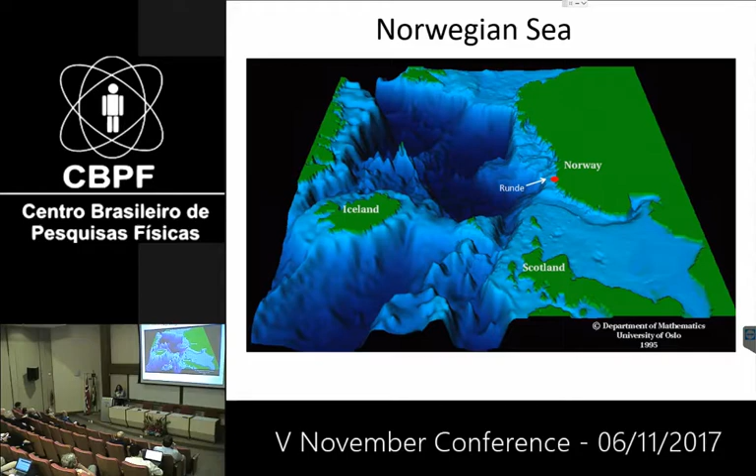It is close to the deep sea and close to the fjords. It's a small island in the Herøy comuna, and this area is very known for its shipping activity.

So here is our research station. We have labs, we have offices, we have a conference center, museum, cafeteria, and test facilities for ocean energy. And the scientific plan calls for work in the fields of oceanography, marine biology, marine pollution, deep sea and coast monitoring, and seabird monitoring.

So, Runde Environmental Center is used to working in tight contact with academia, business, and the public sector. 40% of the center is from the municipality. So we need to help the regional development of the Herøy comuna. So Runde Environmental Center wants to create marine data from the industry and wants to strengthen the regional business and the scientific institutions in Norway.

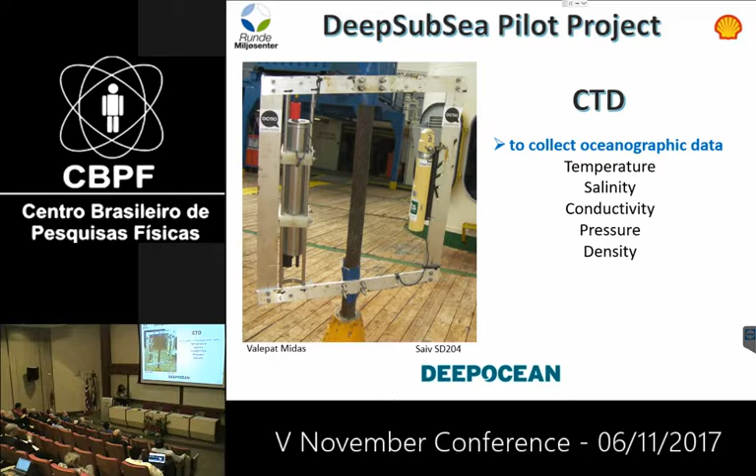It's 2 CTDs, and we found out, for example, the temperature was positive from the surface up to 600 meters. We also registered a halocline and thermocline between 200 and 400 meters of depth. So, with only 2 weeks on board and the limitation of the ROV, we managed to analyze 360 hours, register 176 marine animals. 76% of these animals were megabenthic fauna. That means animals bigger than 50 millimeters and living in a close relationship with the sea bottom.

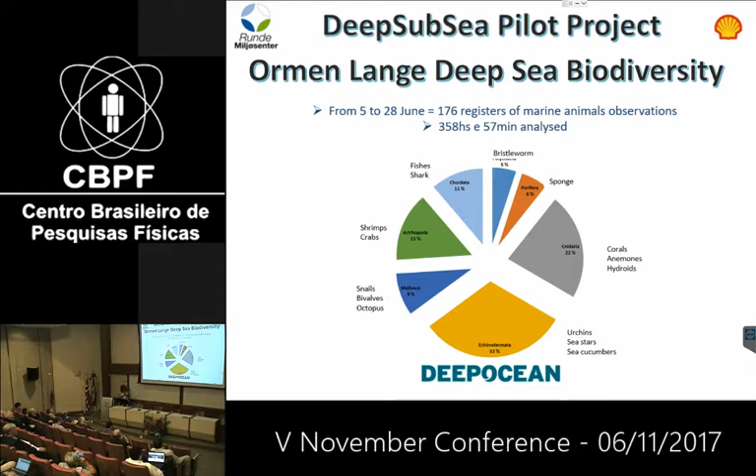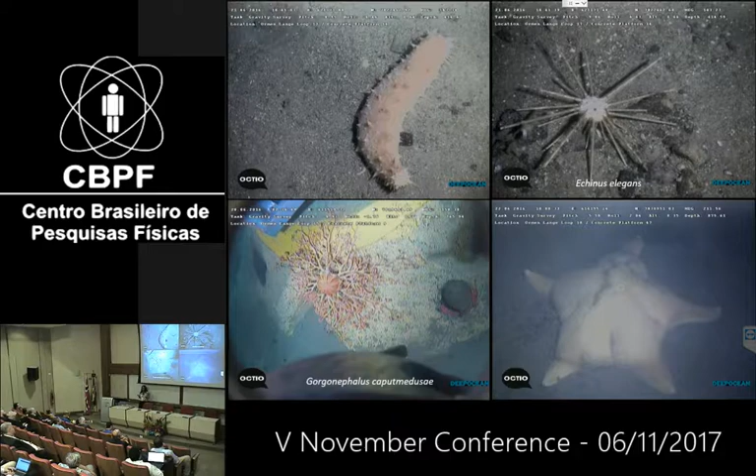Here are some pictures of these animals. Well, as I said, we registered a lot of animals, but many times, because of the gravity equipment, when the ROV comes close to the sea bottom, the sediment rises up and hides the camera visual field, and because of that, I decided to use a conservative criterion for classification of the species.

We observed a lot of fishes using the CP stations to protect them from the local current. These CP stations have been sitting on the sea bottom since 2012, and they are used as a foundation for this gravity equipment. 72% of the fishes were observed below 600 meters with temperature below 0 degrees.

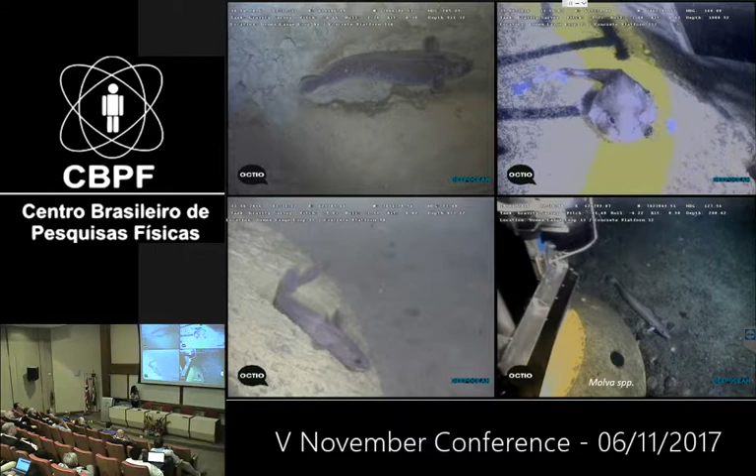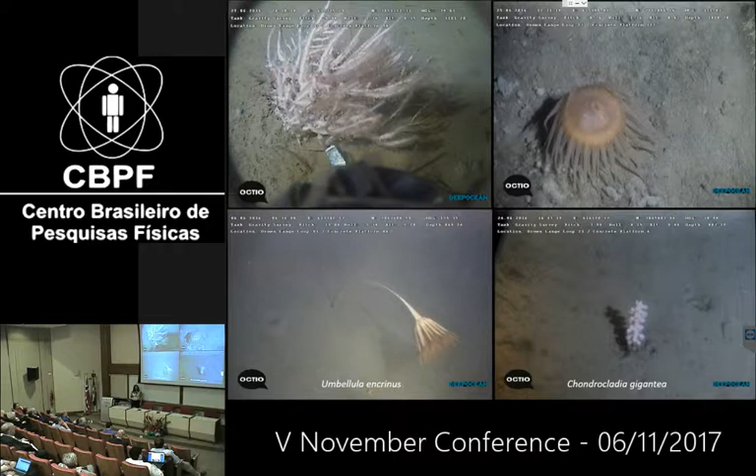The most spotted animal is Umbellula encrinus. This sea pen has been registered in many other surveys in Norway. Looks like the populations are growing in this sediment with mud and sand. And this animal can grow up to 2 meters above the sea bottom. It is considered one of the biggest sessile deep sea animals in the world.

I have a video here. Is it possible to put a video? No?

So this is just a pilot project, but we can see with a little bit of access to the technology, we can really improve the deep sea knowledge. And that's something important for us.

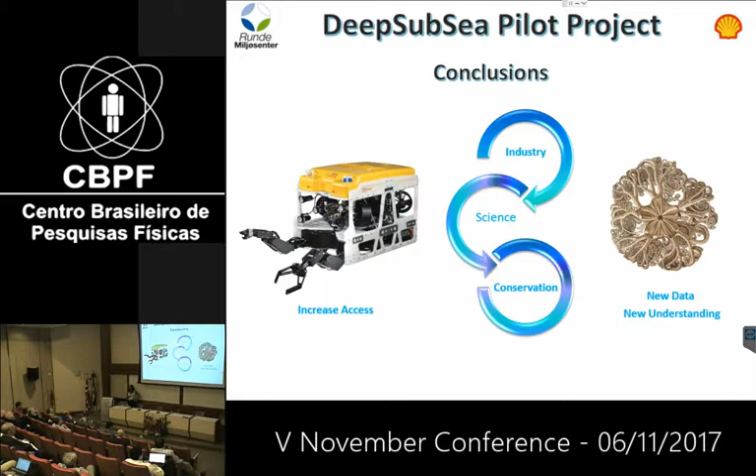Okay. So through the project, we managed to check out how the deep sea is. We got to start up this network with the Brazilians, and after that we decided to continue this initiative,

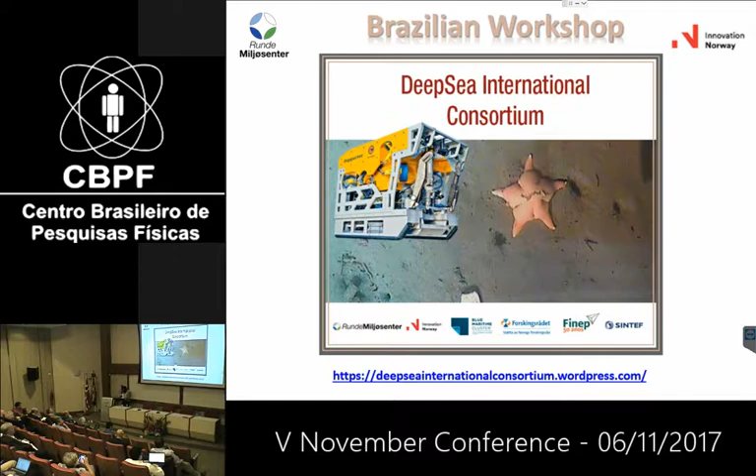the network initiative. Then Runde Environmental Center, in collaboration with Innovation Norway, with the support of the Research Council of Norway and FINEP, organized the DeepSea International Consortium Workshop. That was a 2-day workshop. We had presentations, a round table, and group dynamics. The general feedback from all 51 participants was that the presentations had a high quality and a multidisciplinary approach, and everyone wants to continue this networking.

So we also want to use the momentum that the oil and gas industry is going deeper and deeper to study the deep sea life. And we believe this is the way to collaborate to get a better understanding of our environment.

So we will try to use the arena model to build our cluster. The DeepSea International Consortium is in evolution to become a cluster. And we want to use this model because we want to create this arena for innovation, where the partners can cross their expertise and create new ideas for business and new ideas for research.

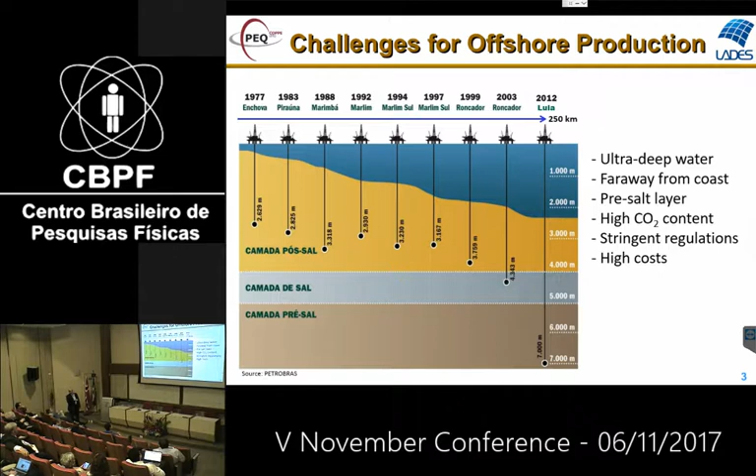Well, the challenges for offshore production: we in Brazil, as you see in this figure, are now producing oil and gas in ultra-deep water, far away from the coast. The gas and the oil are being produced from the pre-salt layer, and the gas has a high content of CO2, which imposes some difficulties and special treatments. There are stringent regulations, and the process demands high costs. Other difficulties are the allocation of multiple wells and the fact that the flow is multiphase.

Additionally, new technologies for subsea processing, with the objective of accelerating production or improving recovery, are subsea units that are difficult to maintain, and at the same time they demand full automation. If we also consider that the process itself is time-varying, nonlinear, and subject to severe disturbances, we really have a very big challenge.

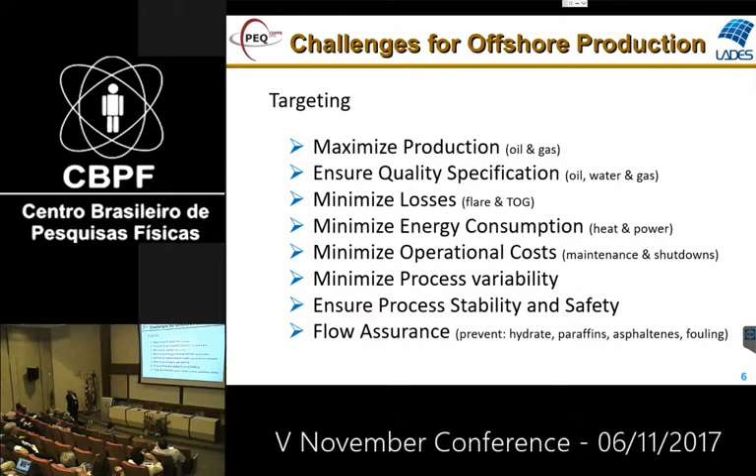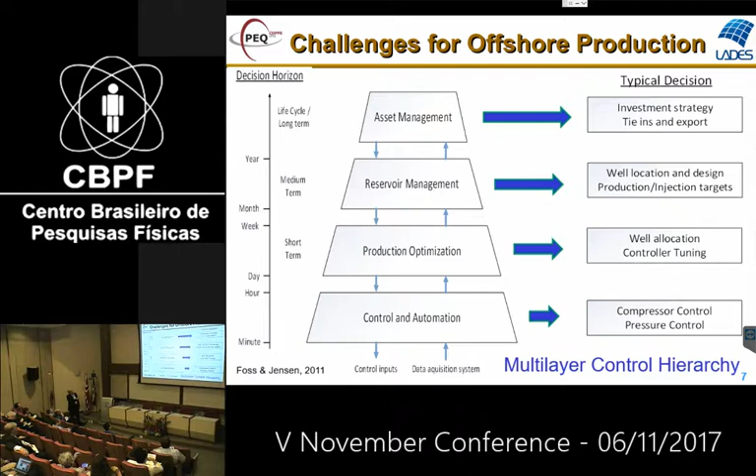Of course, the levels are interwoven, but our main targets are the advanced process control and real-time optimization. So those targets that I had presented before are dealt with here. And in terms of the mathematical formulation, the optimization problem must also consider that the variables must operate between limits of operation due to safety reasons. So we have a constrained optimization problem.

Well, as I said, how we have been working for the advanced process control: mostly, we use virtual plants. We consider that virtual plants allow quick and easy testing of different control strategies. We use rigorous models, and as we are in contact with industry, we use data information from industry. We consider that these models allow education and training of engineers for these advanced tools.

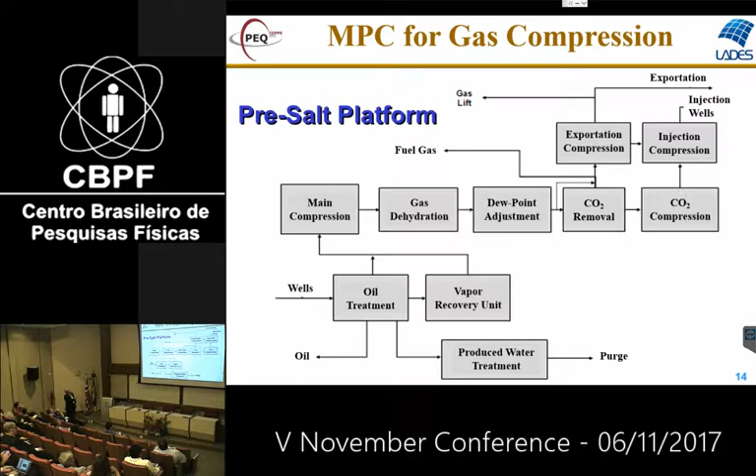Well, I am going to present at the beginning an application of a model predictive controller in a pre-salt platform. I'm going to present it very briefly because it was a topside development. We were concerned about the production of natural gas for exportation. And this gas had to be compressed, and at the same time, it had to be conditioned. So we had to study together with Petrobras. We developed the flow sheet in EMSO considering the process. So here is the flow sheet that was implemented in EMSO.

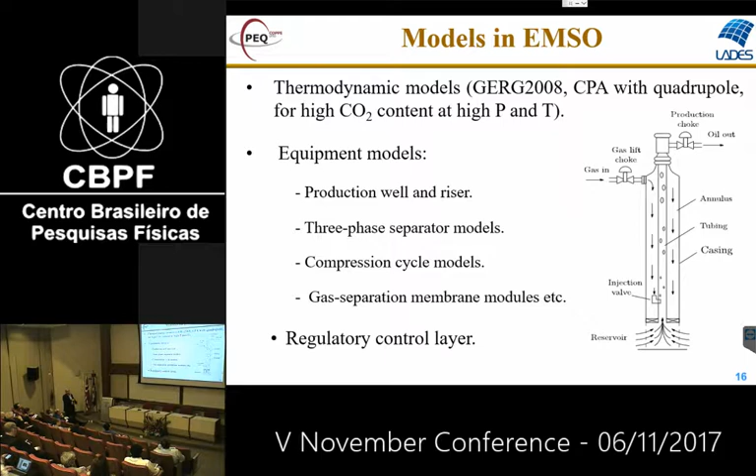We had to implement different models for this project and for others. We had to implement equipment models, like for the production well and riser, the three-phase separator, compression cycle models, and gas separation membrane models, and also for the regulatory control layer. In the case of high-content CO2, we used a plugin named VRTherm, which considered special thermodynamic models for that purpose, so that we are able to simulate that process.

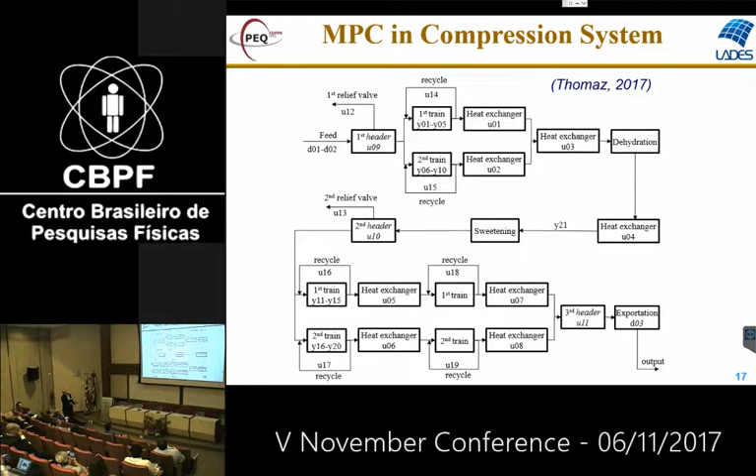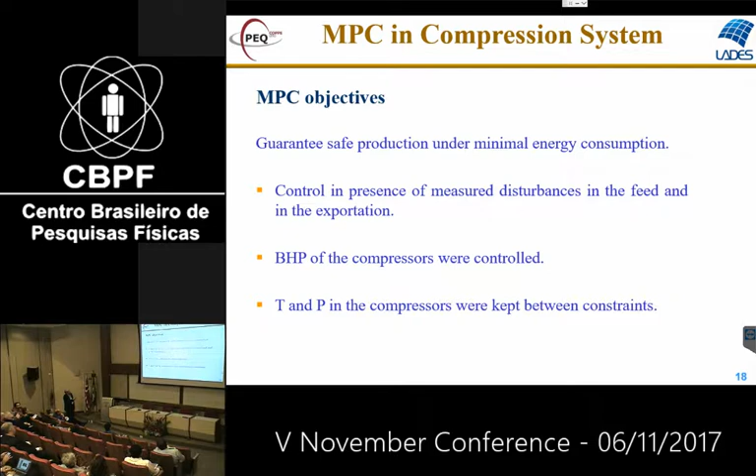Here I show, I will be very brief, that we had many variables that were controlled, especially on the compressor. So it's a multivariable controller that we adopted. Our objectives were to guarantee safe production and minimal energy consumption in the presence of measured disturbances in the feed and in the exportation also. We controlled the BHP, which is the power input for the compressors, while keeping variables of the compressors, temperature and pressure, between constraints.

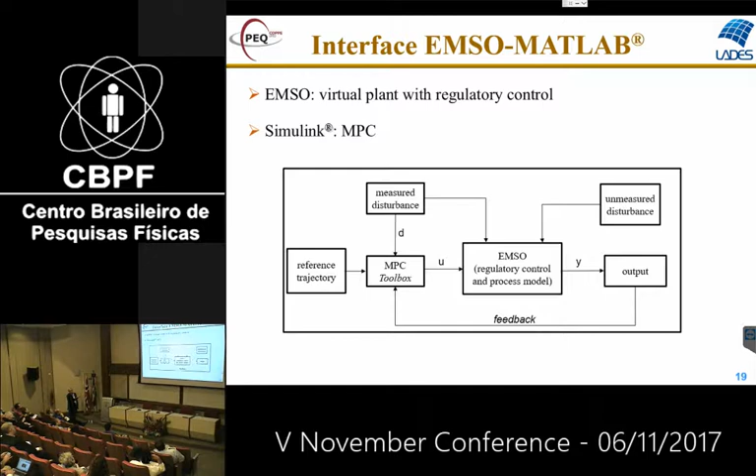We implemented the plant model in EMSO, and we were able to study the process control using MATLAB, for example. And so we had the results that I will show here very briefly. We compared the implementation with MPC and without MPC. And as you see here, the variables should be between constraints. And MPC was always able to keep the variables between the constraints with less work of the compressor and less use of energy, as MPC is a controller developed using a model of the process. So it does a better job.

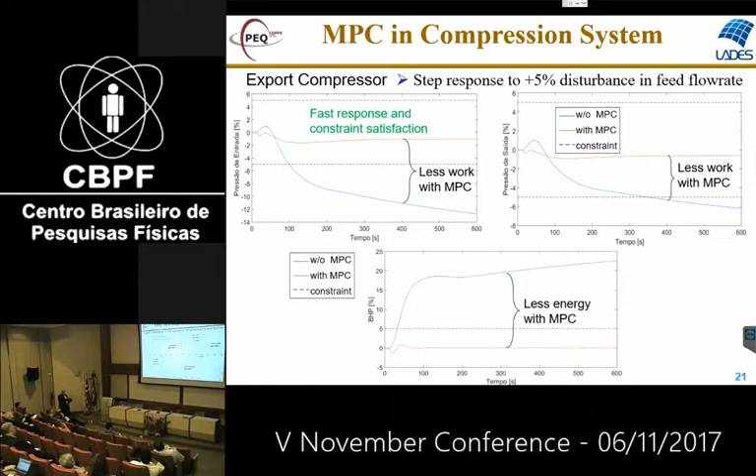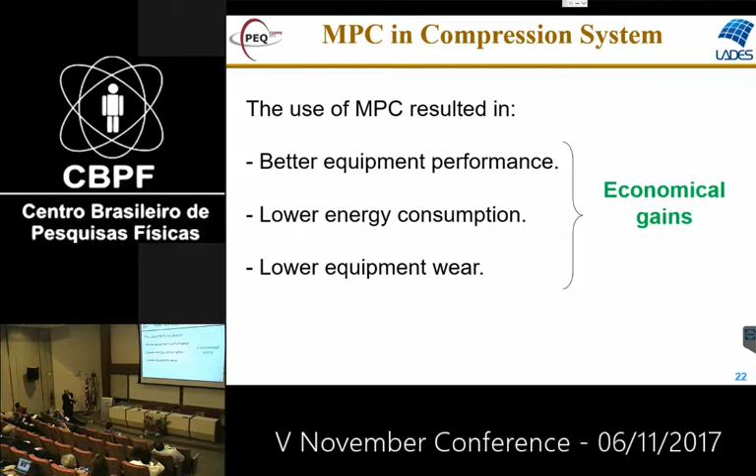And this was for the main compressor. For the export compressor, we had the same behavior: fast response, constraint satisfaction, less work and less energy. So this is an example of the use of virtual models and a model predictive controller. And you can see that this controller resulted in better performance, and with that lower energy consumption, because we controlled the BHP of the compressors, and lower equipment wear. So there is the potential for economic gains.

Now we are starting to work with subsea projects. So I am going to present some major subsea projects that the literature reports exist around the world. And this author here, in a very recent publication, stated that there are about 25 boosting systems around the world and around 7 separation systems.

We separated them here as brownfields and greenfields. And you see there are some applications from Statoil in Norway, like Åsgard, Gullfaks, Tordis. And also in Brazil, here, Marlim, that is a separation system that I will present. And greenfields, like Shell in Perdido, and here in Brazil, and Total in Angola, as some major existing ones.

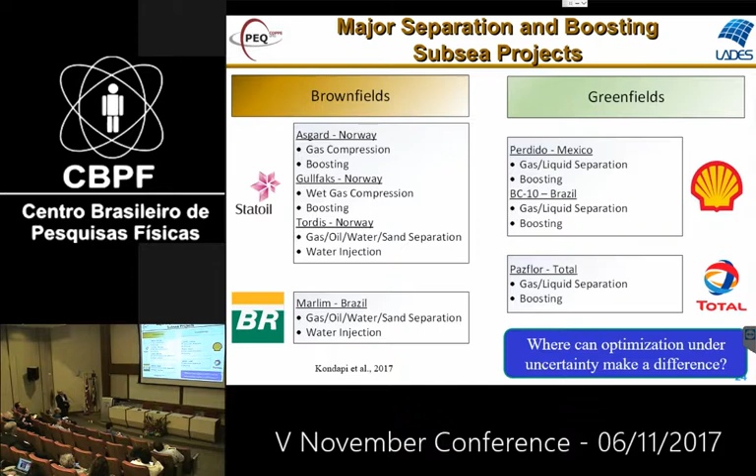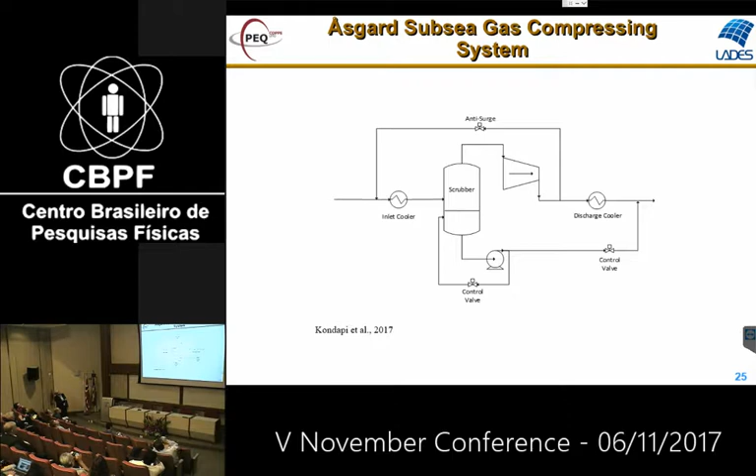And I am sure that the optimization that I discussed previously, but using uncertainty, can help the control of these processes. This is an illustration as an example of the Åsgard subsea gas compression system. And as you see here, the compressor, if I go straight to the goal, the process is typically based on topside compression. And you have to worry about the occurrence of surge, which is a common problem.

So the goal is to operate with maximum productivity, minimizing energy consumption and avoiding surge, but in the presence of model uncertainties. So the compressor control must be carried on with the consideration that the model that we use in the model predictive controller, for example, must consider uncertainties of the environment.

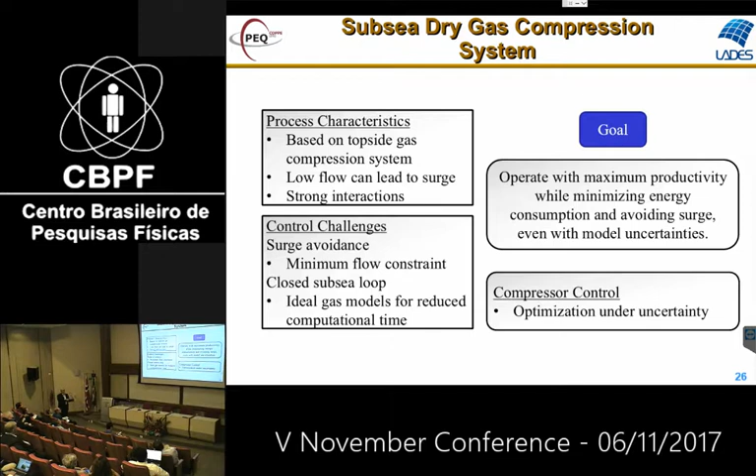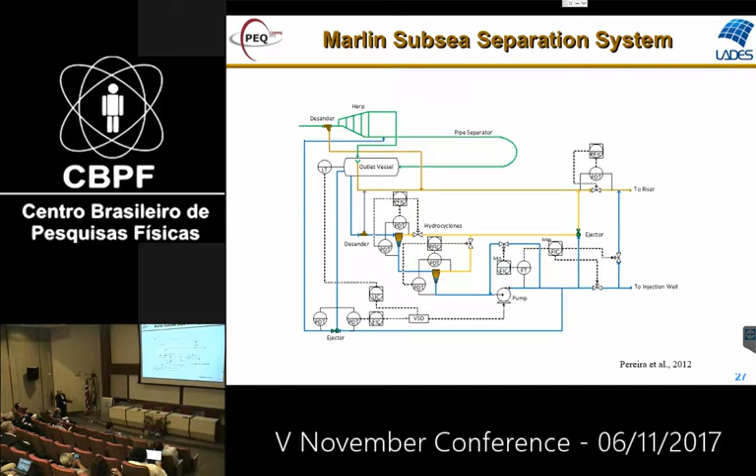If we go for an example of separation, this one is Marlim from Petrobras. This is a reference that was published. So this one separates water and then polishes the water in order to reinject it in the reservoir. This project has some characteristics, like the dynamics is fast, and there are some challenges in terms of lack of instrumentation.

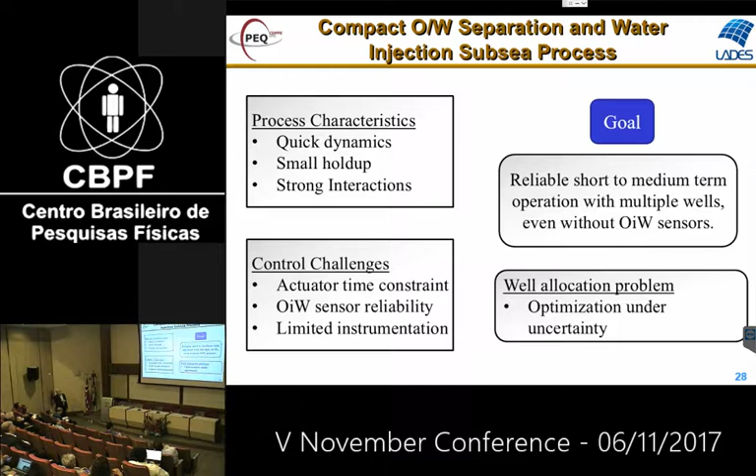As a goal, you have to operate reliably short to medium term with multiple wells, but without reliable or even without oil-in-water sensors. So the well allocation problem should be carried on with optimization under uncertainty. So that's how we are working now. We are working with optimization under uncertainty.

Another subgroup of our group is working with flow assurance. But the question of uncertainty is very important in this context. So I am talking a little more about the problem of uncertainty, because the subsea installations are difficult to access. If there is the need of intervention, it is very high cost. So the system should be self-controlling.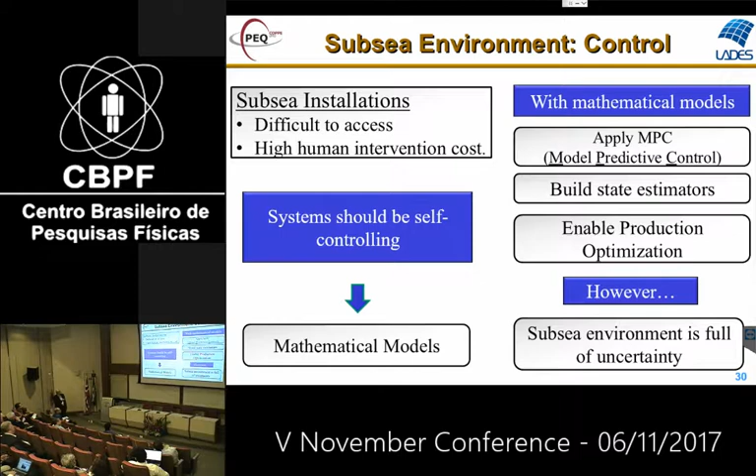And then mathematical models could be used to apply model predictive control, to build state estimators, to enable the production optimization. However, the subsea is full of uncertainty. And where does this uncertainty come from? From the external disturbances, from the fact that the models that we use are simplified ones due to computational reasons. The data that we have may be unreliable, so we have to do advanced control, but in the presence of uncertainty. So we are working with optimization under uncertainty.

And we are now working with this kind of model predictive controller that is multi-stage nonlinear, where we have multiple scenarios. So it's called scenario optimization. We have multiple scenarios in order to consider the uncertainties in parameters of the process. So each model predicts the evolution from a known state. You can have different scenarios, and you can compute the control actions considering all these possibilities.

Now, one of our students is working with this widely known surge problem. Surge is an unwanted phenomenon that may happen in compressors. Using characteristic curves, you can define regions of surge that should be avoided. But as we have uncertainty, we use some safety margins in order to go away from that unsafe region.

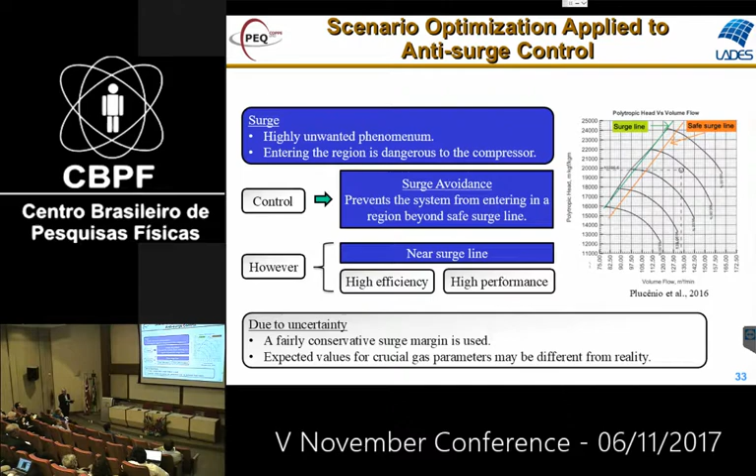And so one of our students, named Ivo, is now working in a collaborative project with a professor from NTNU, Professor Skogestad, and he is studying the anti-surge control, developing the model of the unit, considering parameter uncertainties, and now he is going to implement the multi-scenario optimization and compare with the nominal NMPC implementation.

Okay. This is another research line that professors from our group are working on regarding flow assurance. Flow assurance is responsible for identifying, quantifying, and mitigating the risks associated with offshore production, offshore pipelines in subsea. Because, for example, you can have formation of hydrates, which happen in the presence of some formers, some gases.

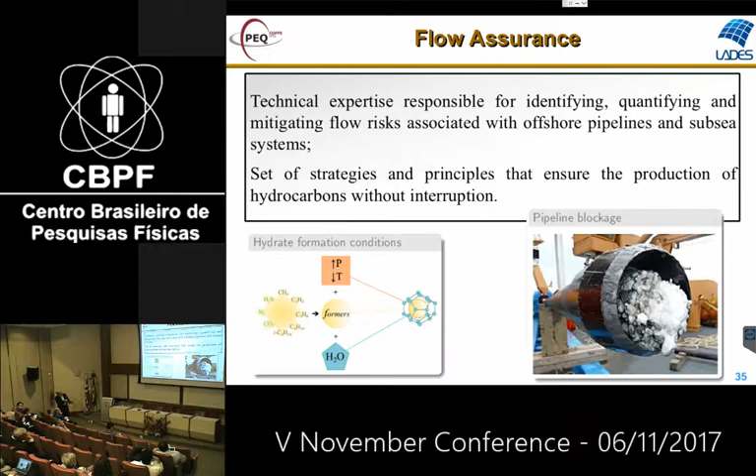Under special conditions of low temperature, high pressure, in the presence of water, a crystalline structure may be formed, trapping the gases, and then the pipelines may present this formation here that plugs the pipeline, looking as if it was ice. And what we have been doing, we are developing models so that we can define the regions that are under the risk of hydrate formation.

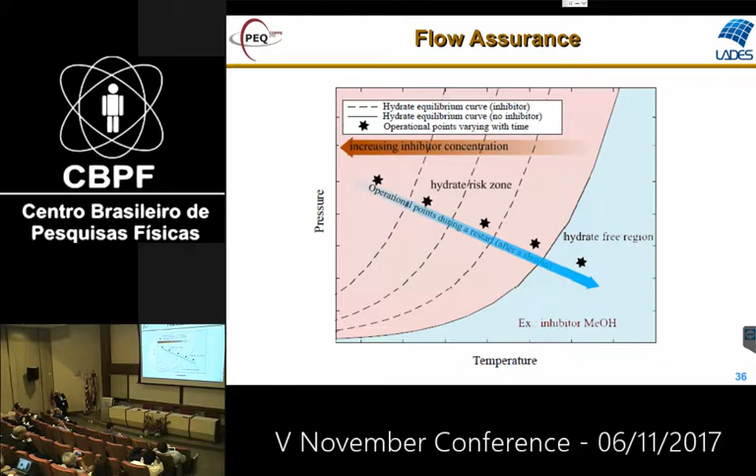And then we can, using models, for example, two-phase flow, predict the flow conditions of temperature and pressure that are inside the hydrate formation regions, and then apply control alternatives, like, for example, to control the topside choke valve to depressurize the system and go away from the region of formation of hydrate. So these are two examples of subsea work that we are developing now.

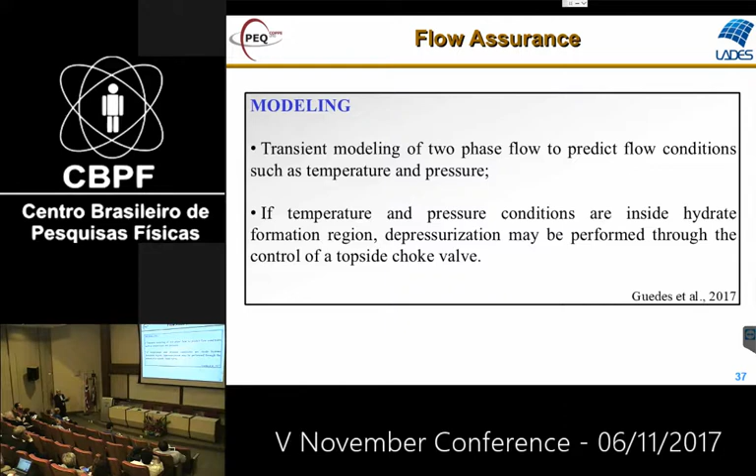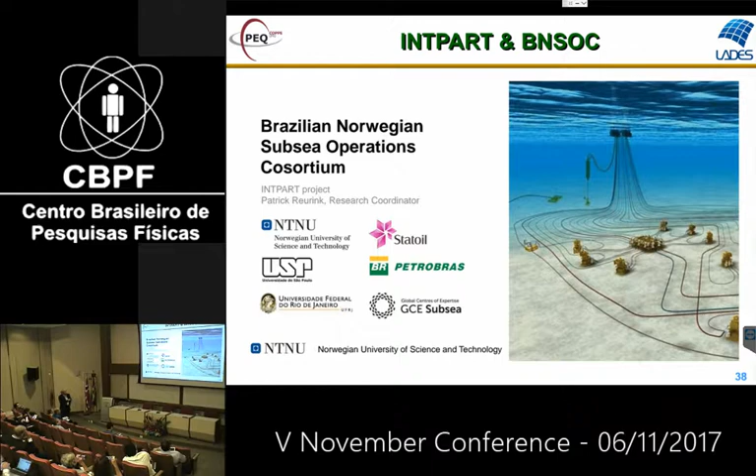This student, Guedes, is also expected to take part in the collaboration because we are taking part of this consortium that Professor Sigborn presented earlier, this BNSOC consortium. So one of our students is already there, and the other one is going maybe next year.

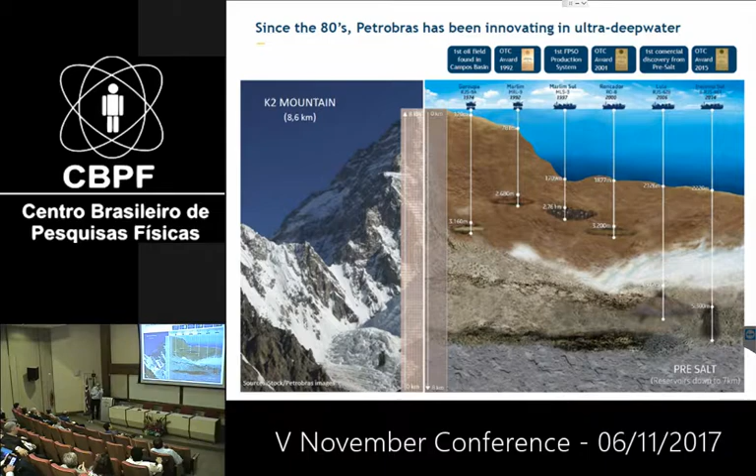Maybe in the future we'll face another kind of change: the need for economic optimization. Up to now, our industry in general has worked with enabling technologies. But in the future we will probably work more on optimization technologies. And it's not straightforward, small optimizations or small changes. We will need step change technologies to deal with future needs.

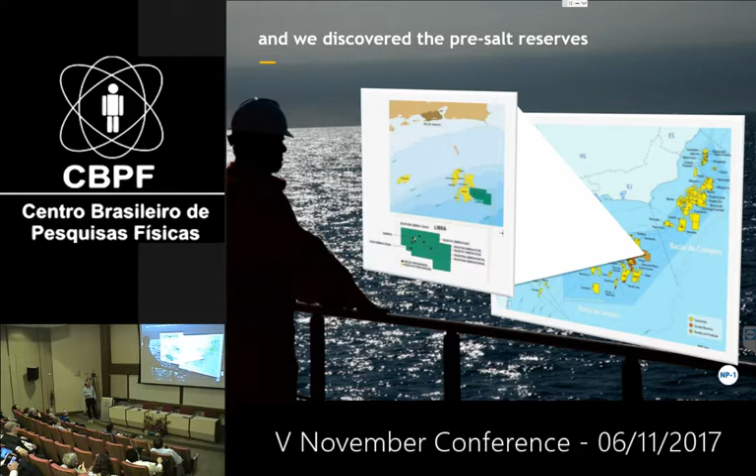In the pre-salt, we face deep water and sea conditions more challenging than we have faced in the past, and fluids with a high content of CO2 and H2S. We have been able to overcome these challenges. We are producing nowadays a large amount of oil. About 50% of this production is being carried out in the pre-salt, and this production will increase.

These figures, excuse me, have some mismatches. It seems that we will have an increase of around 40%, 50% in production. But this is Petrobras production. In fact, part of this increasing oil production, with Petrobras as operator, will belong to our partners in the pre-salt, which means we will produce more than 3 to 4 million barrels per day.

The other important thing is that we will have the natural decline of the mature fields, which means we will need to install a very large infrastructure to achieve these productions. There is some pessimism in our industry; it seems that we don't have many projects in the near or long-term future. But the message of these curves is different. We'll need many subsea equipments and systems to achieve this production.

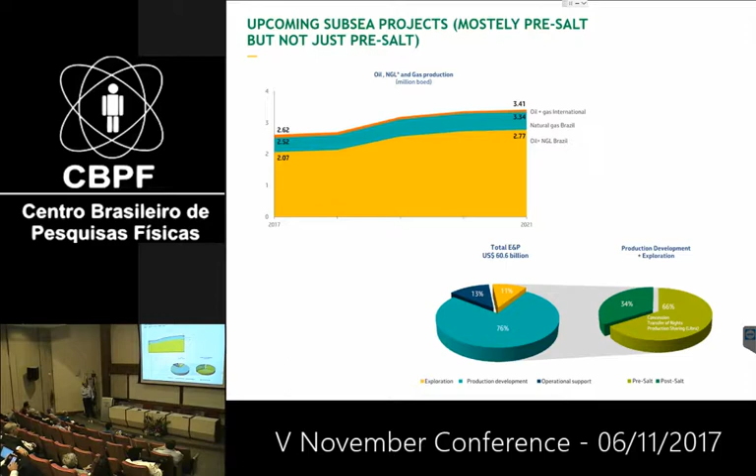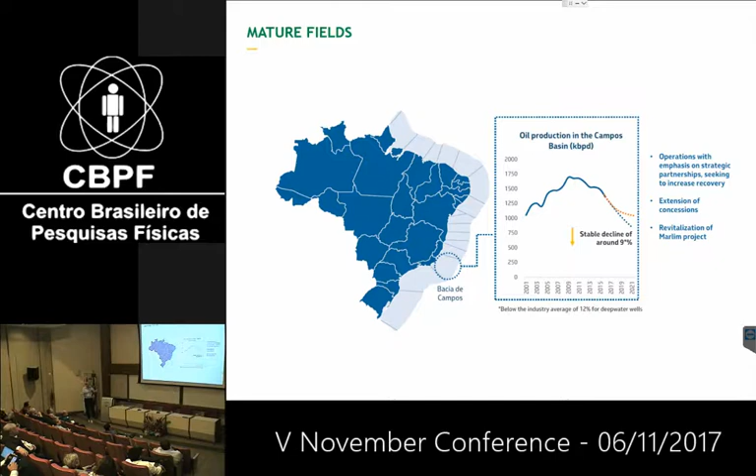As I said, we'll have a natural decline in production. In the world, it is around 12% per year. Here in Brazil, around 9%, and in Norway they have better figures than that. And we need to deal with mature fields. Petrobras in Brazil is pre-salt plus mature fields.

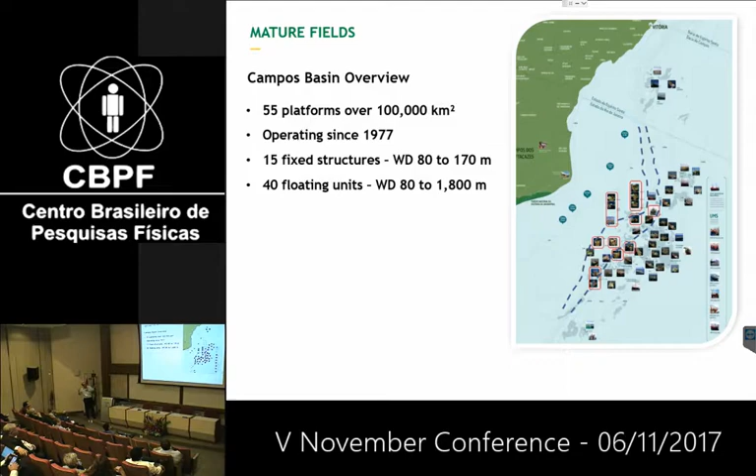In terms of mature fields, we have a large infrastructure installed, some fields producing for more than 20 years, around 30 years in some cases, and a very large subsea infrastructure. We will have new infrastructure, we will need to more than double what we have, but we need to deal with this old infrastructure.

Another important driver is the oil price. Most forecasts foresee a stable oil price, which means we will need to deal with these pre-salt fields and these mature fields with this oil price.

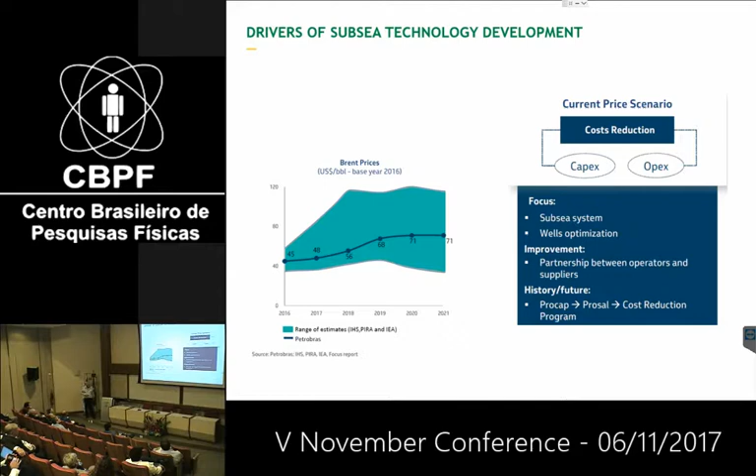Petrobras, to deal with these situations, had in the past PROCAP, a technological program to develop technologies to produce in deep water. We now have PROSAL, which develops technologies to produce in the pre-salt area. And now we are creating and starting the cost reduction program, which will be our main challenge in the near future.

Then the main message is that our technology development needs to deal with many different life cycle businesses. We need to deal with appraisal, greenfields, and brownfields, and it needs to support the whole life cycle of a field.

And the main message about the drivers: cost reduction is the main driver, with investments in various fields, mostly in pre-salt, but we have important investments in mature fields. And another important issue, our industry faces pressure from society to deal with the environment, ensure integrity, and increase safety.

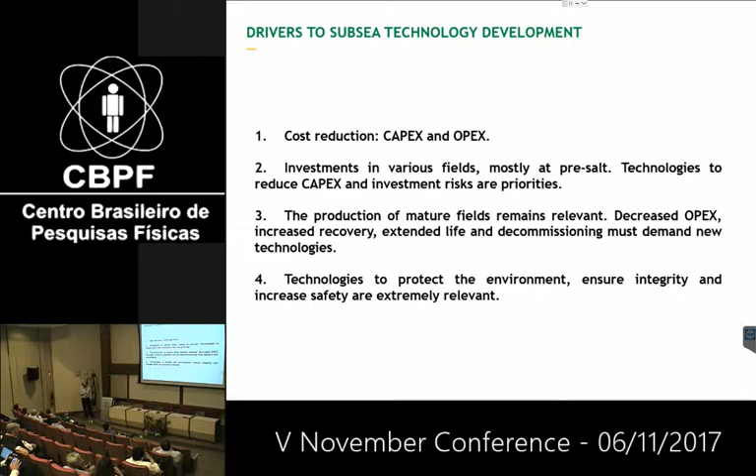I will talk a little bit about these issues. The first point is cost reduction. One important message about cost reduction is that we will not get very good results just working with the subsea area. We need to integrate the areas. Probably in this integration, we'll get better results. We need to integrate the topsides, control, subsea, drilling, reservoir, and so on.

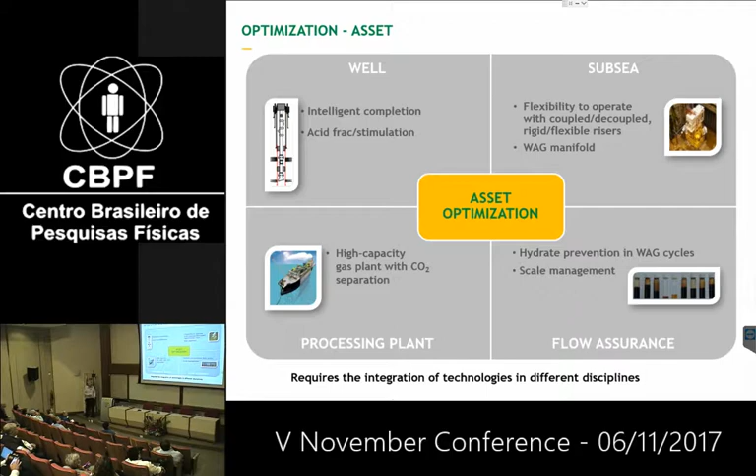One important system, it's technologies that we are developing, we are studying for some fields that have high CO2 content. A special thermodynamic characteristic of higher CO2 contents is that you have some thermodynamic properties with high pressure that lead to the possibility to have separation, liquid-liquid separation with one phase with high content of CO2.

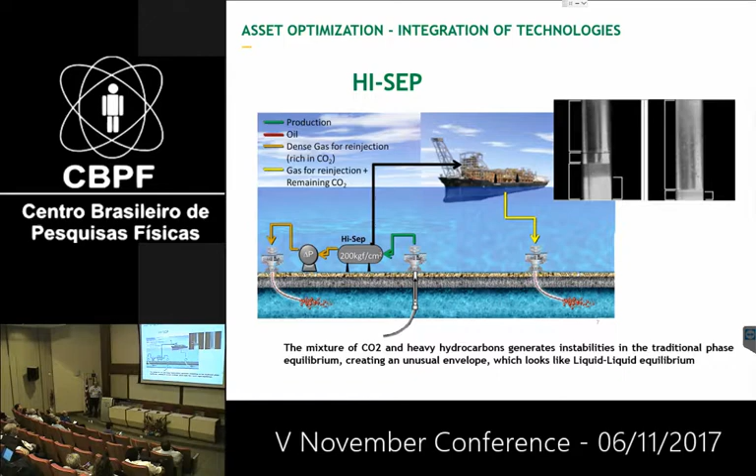Then it's possible to reinject this CO2, avoiding the need for a highly costly topside system, which means we are dealing with increased recovery with this CO2 reinjection, simplification in topsides, and environmental benefits, avoiding the production of CO2.

Other optimization in terms of subsea is simplification in layout. I'm showing here some optimizations that have been carried out in Pre-Salt. We have developed some design tools that improve our mooring and our riser design. With this tool, it was possible to save a lot in terms of layout, in terms of length of flow lines, and so on.

But we can have important improvements developing new tools and developing flow lines with new materials, and eventually developing new equipment like pig launchers, like spreading the use of multiphase flow meters, where Norway has carried out very important work in academy and industry. Maybe this partnership could help us to use multiphase flow meters in a better way, and this could lead to better layout and better subsea arrangements.

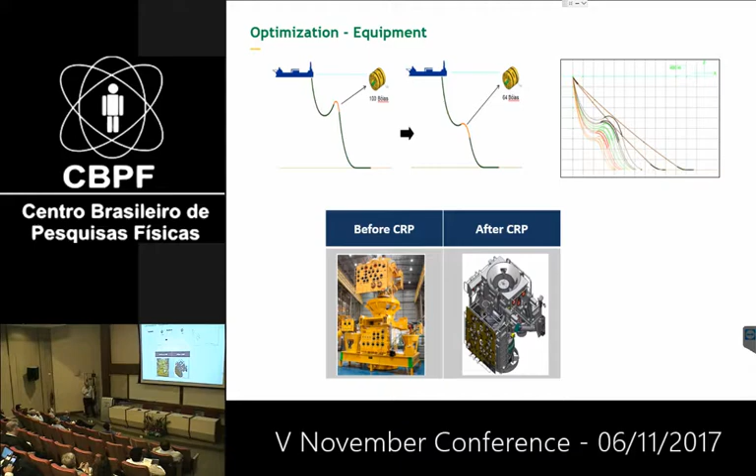Excuse me. Another issue is simplifications in the Christmas tree. We have carried out a cost reduction program to try to simplify the Christmas tree. We have worked with suppliers, but we see possibilities to simplify more. And this additional simplification would involve decision tools, because sometimes you have a trade-off between simplification in terms of CapEx and cost of OpEx, and it's very important to have knowledge and tools to carry out this simplification. It's not just good equipment. It's necessary to have decision tools in order to simplify such important equipment.

Another area of optimization is installation. We are now using what we call CESV. It is a vessel that has been conceived here in Brazil and has been manufactured in Norway. It's operated by a Norwegian company, and it allows the installation of some subsea equipment like flow bases and Christmas trees with a lower cost than the traditional way using rigs.

Another example is the pendulum installation method, where the academy has been involved to carry out some tests and simulations about this installation method. Here is another partnership with the academy where we have worked with Universidade Federal de Pernambuco. They have developed a tool that's able to evaluate the shape of the flow line during a vertical connection of this flow line with subsea equipment. And with this information, it's possible to accelerate the installation process and mainly have more safety in the installation process.

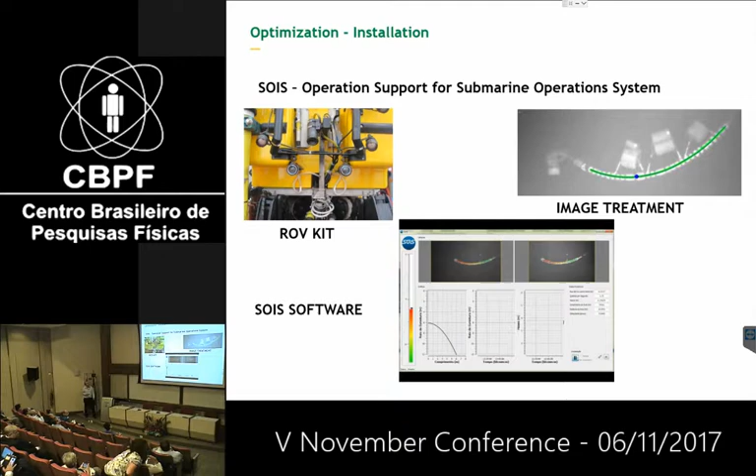It's one important example. Another issue is integrity. We have integrity in mature fields. That's a very complicated issue because we have many different equipments with different situations. In some cases, we want to extend the life of this equipment. In other cases, we need just to guarantee the integrity of this equipment, which means we need the support of many technologies to support the integrity of mature assets.

In new assets, we need to think ahead about the integrity issue. We are working in a more complex environment, and eventually we will work with more complex equipment like subsea processing and so on. And to work with this complicated issue, Petrobras has worked with a university in order to prioritize some projects. These projects are related to risk-based integrity management tools, the development of real-time monitoring systems, and autonomous inspection systems.

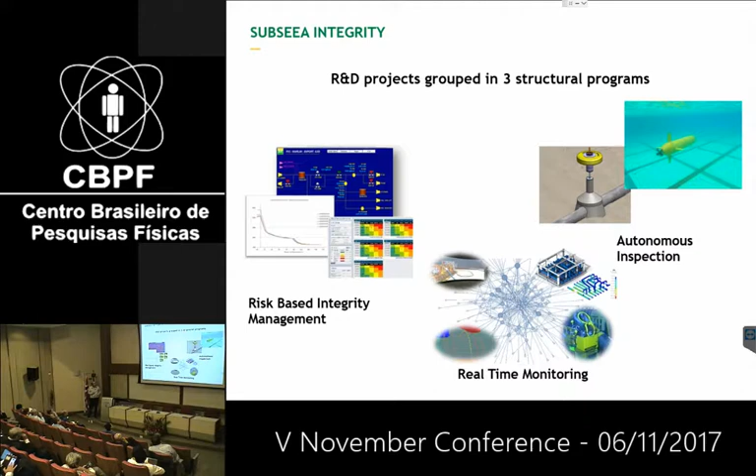In terms of technologies for mature fields, as I said, it's an important issue to Petrobras. We need to remember that pre-salt will be a mature field, and it's important knowledge. And Norway has good knowledge in this area. We have just signed one agreement with Statoil to exchange information in this area.

In terms of subsea technology, subsea technology could help to increase oil recovery using subsea processing. Not just using subsea processing, but subsea processing is an important tool. Petrobras and other companies, as mentioned here, have worked with subsea processing, but we have a big challenge with this oil price. Then we need to optimize this system in terms of costs.

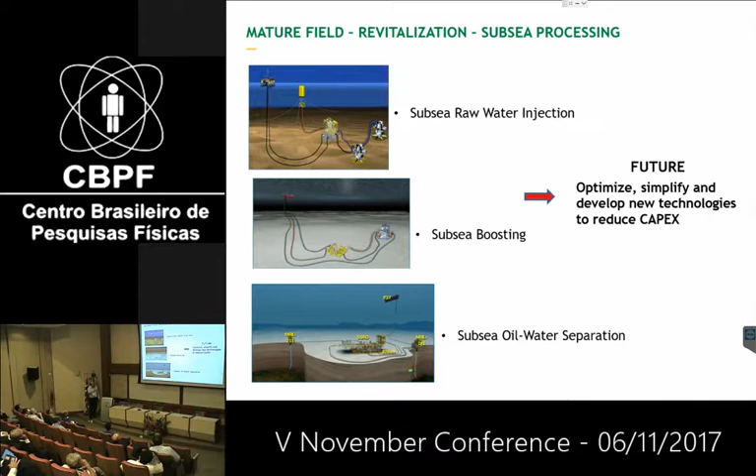And this optimization is not just simplification, trying to cut small costs. Maybe you need new technologies to have very high cost reductions. Here, again, we have worked in partnership with Norwegian companies. All the systems we have installed are using Norwegian subsea pumps. In this system we have worked with a Statoil patent, which means we have had partnerships to develop this system, and maybe we need more partnerships to carry out this optimization and simplification.

Another issue related to mature fields is decommissioning. I think that we'll have a specific meeting to discuss this issue. It's a very complicated issue when you deal with subsea equipment. We have a lot of challenges in this issue.

And finally, we have a relationship between subsea technology and the environment. We have had a very nice presentation about the DeepSea program. And I intend here just to present what we consider nowadays our main challenges in this area. The first is biofouling. Biofouling by bioinvaders, non-indigenous species. Although some of these species are very beautiful, they are invaders, and they compete with natural corals or natural species, which means we need to develop technologies to deal with this biofouling.

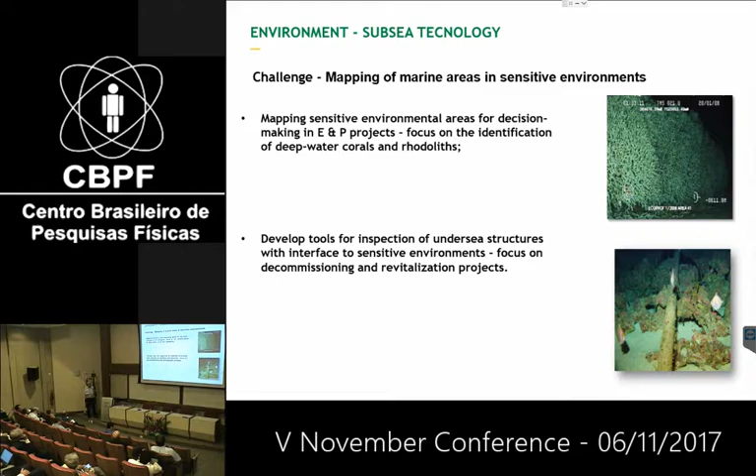This is a very important issue, and another important issue is mapping sensitive areas. We have in some areas, like Marlim Field and other fields, some deep water corals and rhodoliths, and we need to deal with these species and develop tools for inspection, mainly in some sensitive areas. We have some important sensitive areas where we have special subsea inspection tools to explore these areas.

Then a brief summary of what I have said. The main message is a message of certain optimism. We'll have a large investment in the subsea area, maybe less than we foresaw in the past, but for sure it will be significant. We will need to deal with low capex and low opex. Integrity, reliability, safety, environment are very important technologies. We'll need to produce and deal with mature fields. We'll need to work together with other areas to increase recovery. We will need to deal with decommissioning and so on.

And we'll have a large range of demands. It's the subsea area. It's a very complicated area because we'll deal with a lot of expertise, and we need to integrate this expertise in operators, suppliers, and academia. That's a very big challenge. We know that Norway has some ability to deal with this complicated scenario, and maybe it could be an opportunity to work with Norway, because we could have some improvements in the way that we work here in Brazil with such a complicated scenario. Okay, thank you.

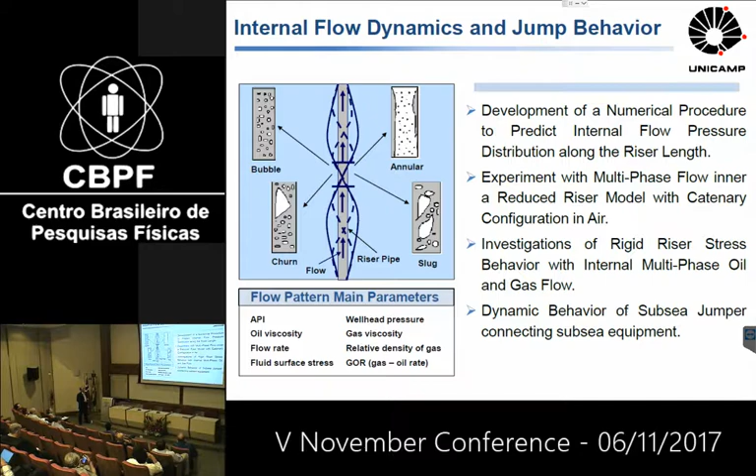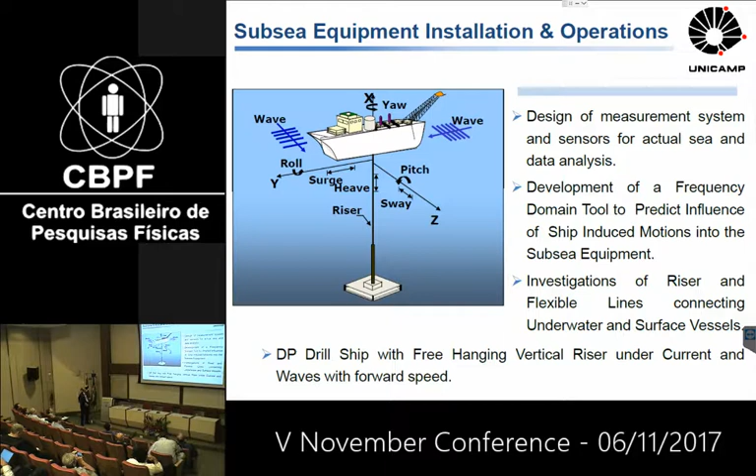The following 3 slides is just a list of top projects that we developed, research projects that we developed in the past. I will just go through quickly. This is the subsea equipment installation and operation. So vessel interacting with the riser and the equipment at the bottom part of the system. In the re-entry operation, where you have a very heavy BOP at the termination of the riser, how to approach safely and how to approach quickly to the wellhead, and how to control this approach.

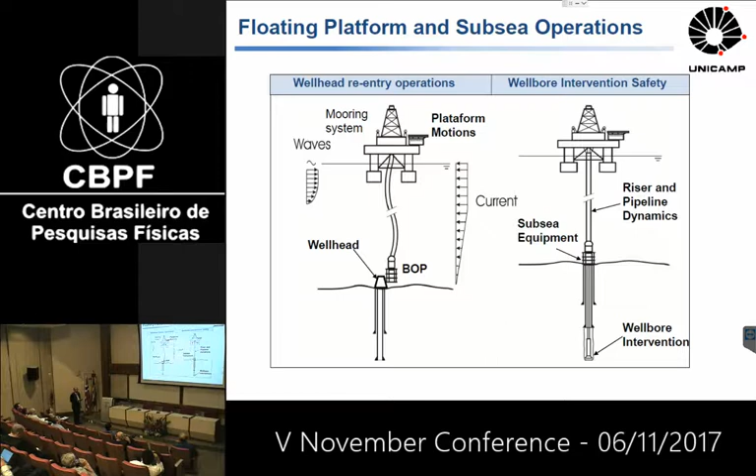When you do the drilling of the wellbore, you have all the dynamics of the system, and you have also the drill column inside of the riser pipe. So during this behavior, how the riser column will interact with the wellhead. This is another study we did in the past. What will happen inside the wellbore? So another topic we are focusing on in the group is the integrated barrier in terms of the safety operation of the wellbore. So what could be considered as a barrier, and how many barriers you need to have a safe well operation. So this is another topic of our research group.

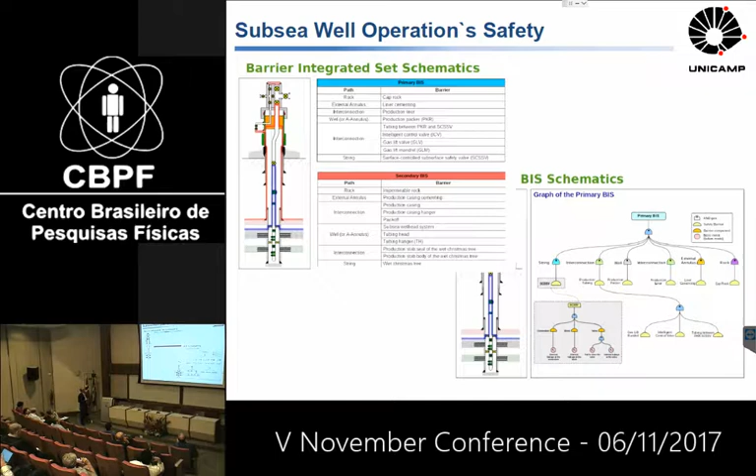Using those models, I would like to show only one example of the project we developed, which is moving the drill ship with a suspended BOP. In order to accelerate the operation for drilling wells, instead of recovering all the BOP system to the surface, the idea is to recover only the first 3 or 4 joints of the riser column. So you have a long riser with BOP suspended, and the idea is to move to the new site in this way. So suspending the BOP, during the movement you will of course face the sea environment.

So what will be the operational limit for this kind of drill ship movement? So this is the main issue in this project. So the idea is to quicken the deep water drilling operations, not recovering all the drill column, but just the first few joints.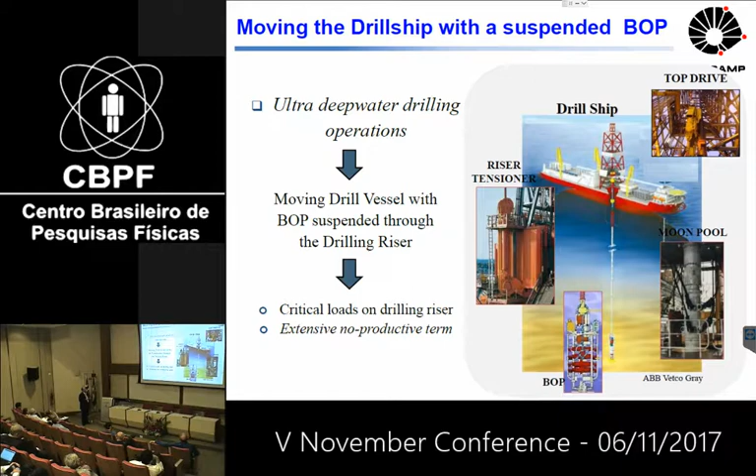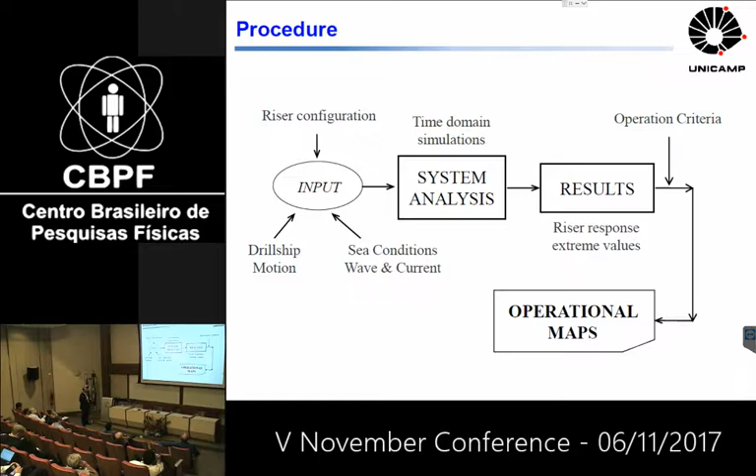The idea to solve this uses all those models that we developed through the research. Having the riser configuration, the drill ship motion, and sea condition, we have the conditions to make time domain simulations, and through the time domain simulation, we have the riser and system response extreme values. With those answers, we are proposing to draw operational maps. Through the operational maps, you can find the safety zone for the operation of this kind of drill ship movement in different sea conditions.

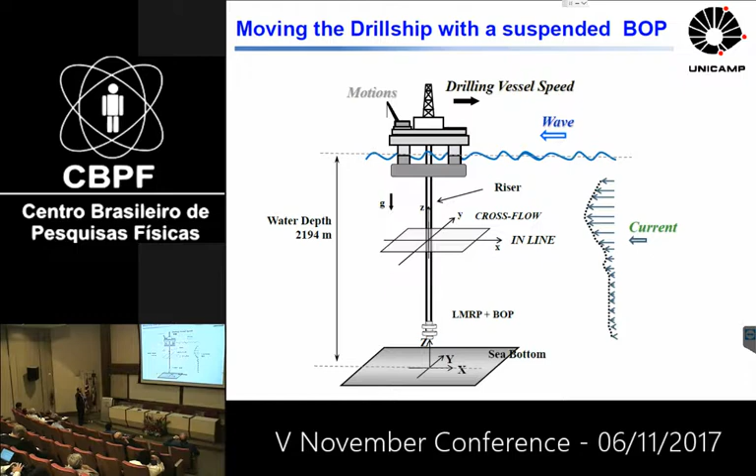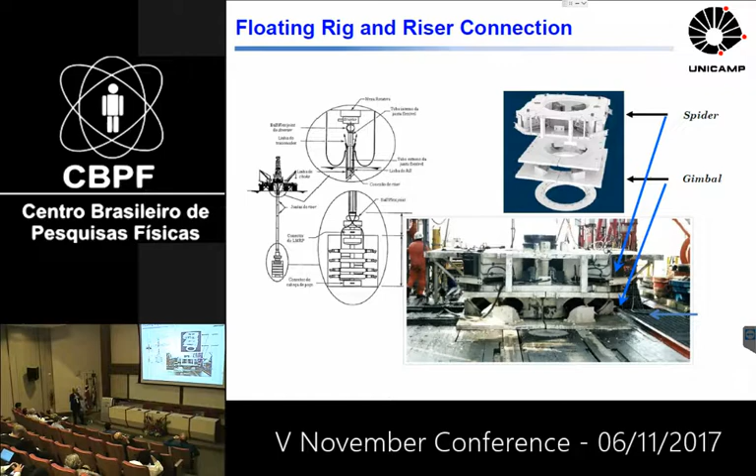This is just a sketch of what is happening. We have the drill ship, the drill platform at the top, the riser and the BOP at the bottom. You have the current, the wave, and you have the drill vessel moving against the wave in very deep water. We model the top connection with the platform. There is a gimbal, a spider, so we could model this device in our model.

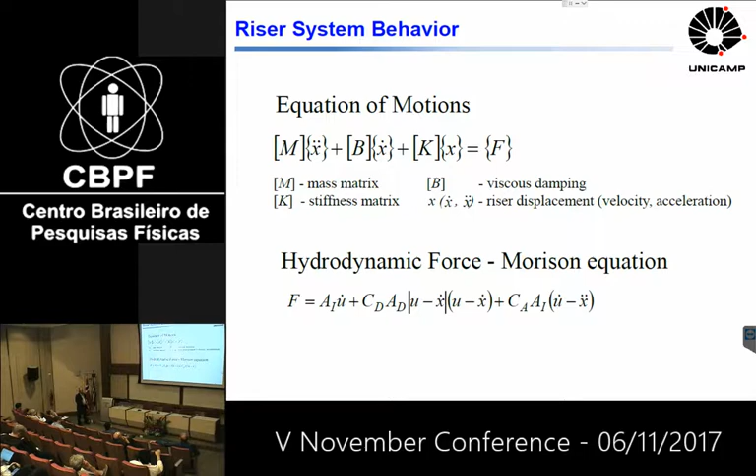Through the equation of behavior of the riser and the platform system, and considering the hydrodynamic forces from the current and sea waves, we are able to predict the behavior of the riser vibrations and also the BOP motions at the bottom, and the angle between the BOP and the riser, which is very important in this operation. We consider different sea conditions in this model. We used the PM wave spectra.

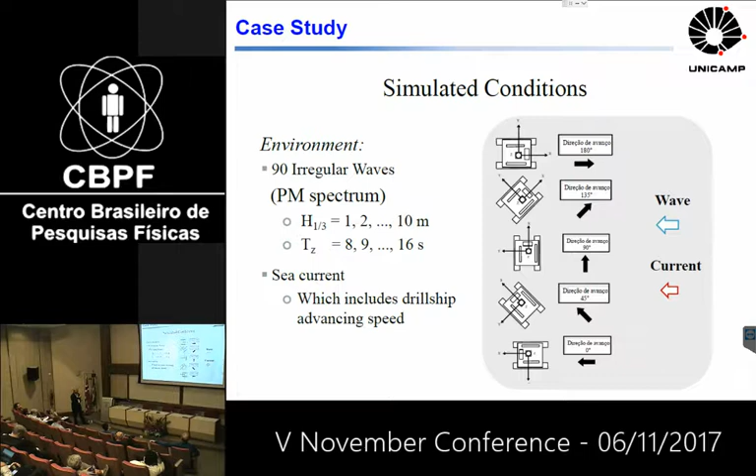And we calculated stresses in different parts of the system. With the stresses estimated, of course, you can go, for example, to evaluate the fatigue problem in the system. We simulated different conditions, varying the significant wave height, the mean period for the wave spectrum, and we also considered a varying profile for the current in the place, and different advancement directions for the platform.

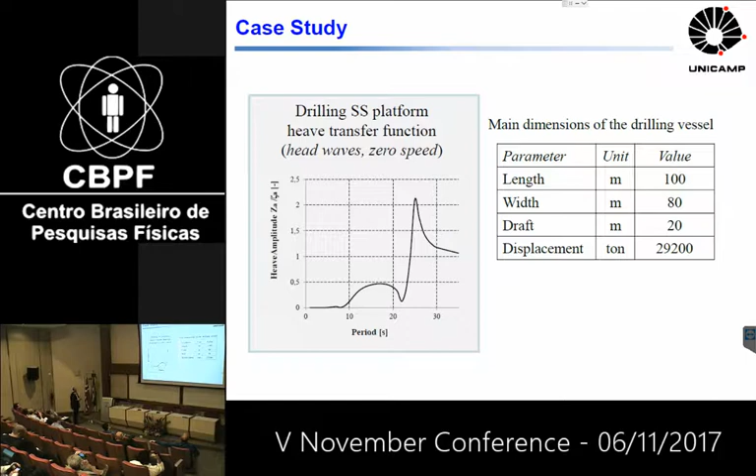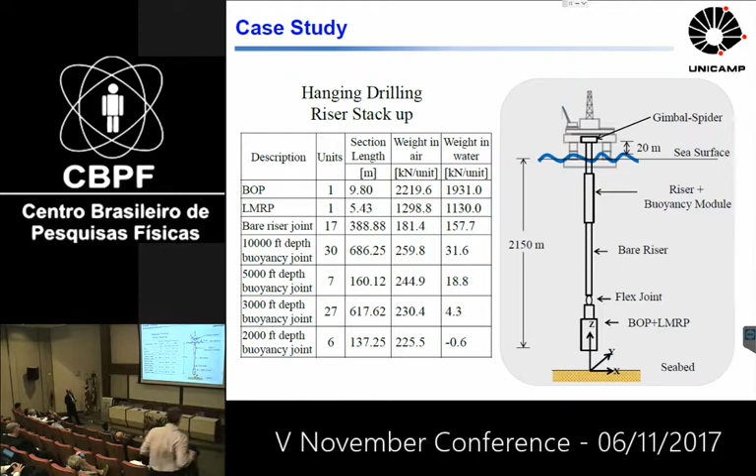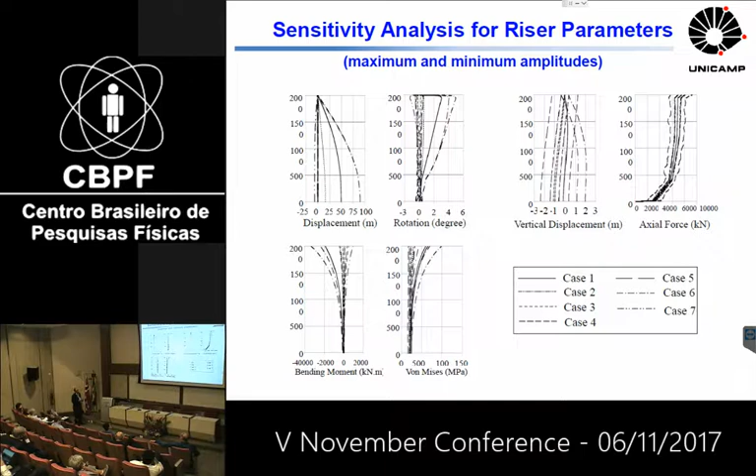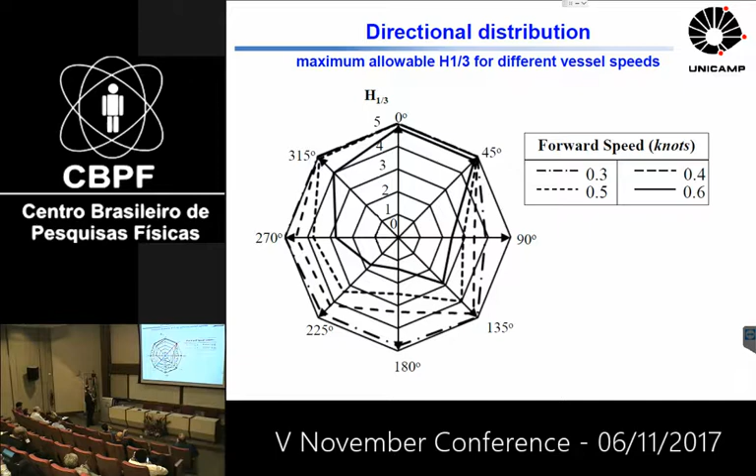Another way to show the same result, with directions in a round way. You have the wave height in the vertical, and the contour for the forward speed. With this kind of map, the operator can know the limit for this operation. The big question was how much forward speed can I go. This is the main question from the operator of the drill vessel.

Just some conclusions from this part of the work. I think the most important is this operational map that can help the decision to speed up or slow down vessel speed safely, reducing downtime of the floating drill rig.